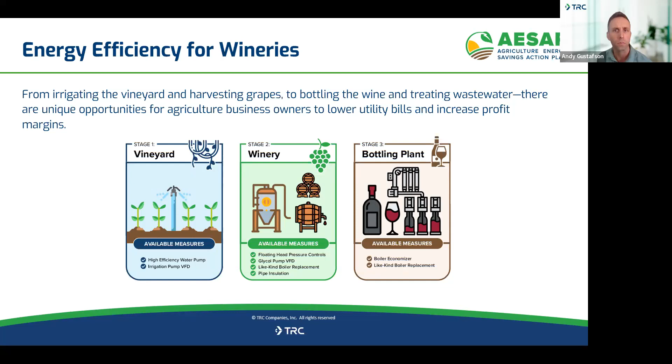So to segue into the refrigeration topic for today. Refrigeration systems are often the largest energy consumer in the winery. These systems are designed to meet full load, such as during the crush season when tanks and barrels are typically full, so the chiller would be running at near full capacity. But during other seasons, the load on the refrigeration system goes lower than that design capacity. So because of this change in load, there are often some unique energy efficiency and savings opportunities there.

For the purposes of this call, we're going to be focusing on 3 refrigeration related measures with the program that we've been promoting and have had some success with, key measures we think would be good to highlight for today. There might be other opportunities, but these are the ones we'll talk about today. These specifically include glycol pump VFDs, floating head control, and VFD trim compressor.

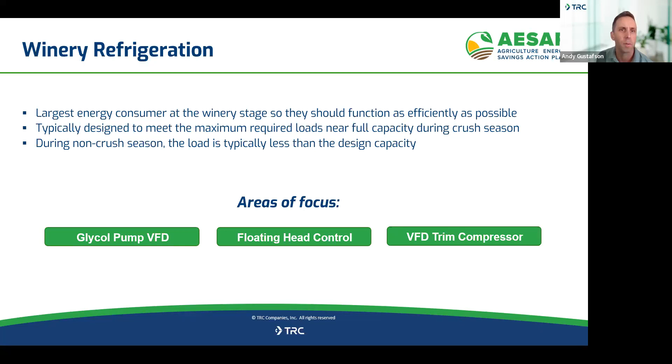So the first measure is what's called a prescriptive deemed rebate opportunity, and this is for adding VFDs to the glycol pumps used for process cooling. When I say prescriptive rebate, I'm referring to the fact that the measure is pre-approved and no pre-approval is required to implement. We simply collect an invoice and the required documentation, and we cut your rebate check. So it's a pretty streamlined offering.

This is for a situation where the glycol circulation pumps are running at constant speed, even though the glycol is being bypassed from the wine tanks and recirculating right back to the storage tanks. Adding a VFD on those pump motors will decrease the glycol flow to reflect the actual load on the system. The savings are realized similar to other pumps and fans through the affinity law, where the power is proportional to the cube of the speed. So reducing the speed of the pump results in a cubic reduction of the required horsepower, resulting in the savings. This reduces the energy required to pump the glycol by adjusting the pump speed to the actual demand on the wine tanks.

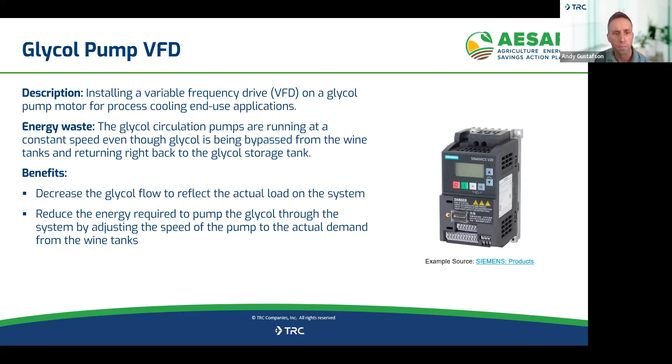Also, just a note that if the chilled fluid is other than glycol, it can be considered for the rebate, but only if the unit energy savings equals or exceeds the unit energy savings for the measure. So if you have another fluid application, reach out to our team and we can help confirm if it meets the requirements. The unit energy savings is basically calculated as the difference between the energy consumption of the constant speed pump motor and the measure case. So as long as we can show that based on the horsepower, the load, and the operation, it could qualify. The table on the right shows the specific rebate levels for this measure. And there has to be automated controls based on pressure feedback for the VFD to control that flow rate.

So we need to collect that documentation for this, but largely, if you just go ahead and you put the VFD in place, you send us a copy of that invoice along with the documentation for those requirements shown here and that are listed on our rebate catalog. We'll cut you a rebate check for it. And those rebate levels are reflected here in this table once again.

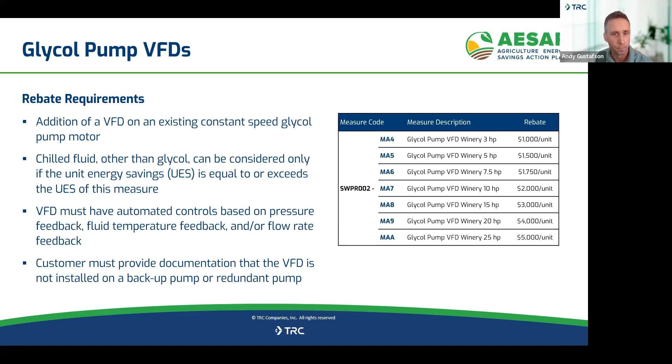So for example, if you have a 25 horsepower glycol pump VFD, that would be a $5,000 rebate. So you can have multiple of these if you have multiple pumps, but it gives you an idea of the rebate levels for that specific measure there. So that's glycol pump VFDs.

The second measure we'll talk about right now is floating head or variable head pressure control, as it's often called. This is a strategy which aims to improve a plant's refrigeration energy efficiency by optimizing both the head pressure and the intermediate stage pressure of the refrigeration plant. So often the refrigeration systems are run on kind of a set and forget it type basis related to the plant's head pressure.

So the lack of that flexibility in the head pressure leads to unnecessary energy consumption. Condensers are largely running oversized because they're designed to reach the worst possible conditions the plant might see in the wet bulb temperatures. So basically the systems are often designed to meet that worst case scenario. But as you all know, during a lot of the year, the plant condenser is under lower loads and the system is often wasting that energy.

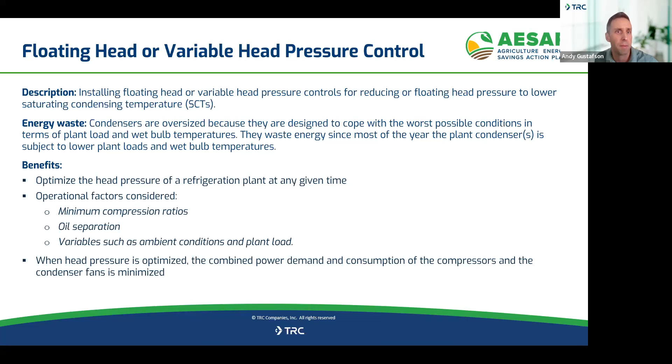So the wet bulb typically fluctuates only with the change of the weather, while the floating head depends on the wet bulb of the plant. So a well-structured floating head system will dampen those head pressure fluctuations. The reduction would also stabilize the head pressure of the plant, resulting in a more efficient and also more stable plant operation throughout the year. So as you can see on the slide here, it highlights some of the benefits and key considerations when we're looking at the floating head pressure, variable head pressure control opportunity.

The next slide here, I want to highlight that there is a deemed rebate for floating head, variable head pressure control for just specific scenarios. These scenarios include connected display cases, walk-in coolers, freezers, cooled storage, and prep area type situations. Subcooler loads and air conditioning loads are ineligible for this rebate. The rebate levels are based on the tons of refrigeration capacity and the saturated condensing temperature difference, or that TD value there. So you can see that the rebate level ranges from $150 to $250 per ton of capacity.

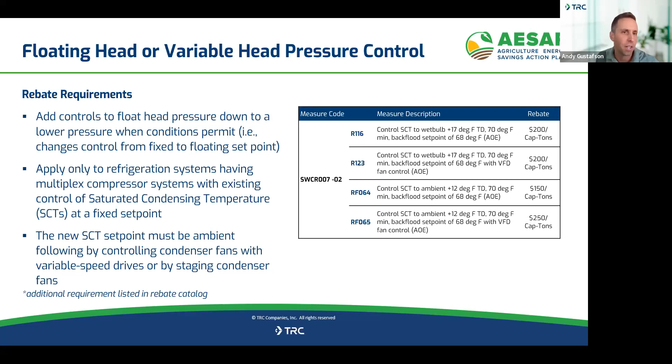If it is a better fit, the measure can be processed under a custom incentive, which is shown on the next slide that I'll get to. And our team is here to help determine what makes more sense, a prescriptive rebate or a customized incentive. They both have their pros depending on the type of application, and we can help with that.

The custom calculated approach would basically be providing an incentive. So if it doesn't fall under those conditions for the rebate shown in our rebate catalog and that prior slide, we could process the energy efficiency measure under custom calculated. That's where we provide an incentive based on calculated energy savings and also some other payback criteria from the customer, but largely based on the energy savings that we calculate. In order to do that, we would need certain information, and that information would greatly help us with that determination.

So I want to highlight some of the key information that we would need in order to calculate the savings potential. The first one shown here is the refrigeration system serving the fermenter and storage tanks. Those qualify for incentive, but we would need nameplate data for the mechanical schedule. That would include the compressors, the condensers, showing the manufacturer, model, serial number. So basically those associated nameplates.

If it's easier, we can certainly go out to the facility and take those pictures ourselves. If anyone that's interested in this can go out, snap a picture of the nameplate of those key mechanical equipment and send that our way, that would be a really good first start in determining the savings potential. The other key thing we would need is trend data, the digital trend data, if it's available from the SCADA system or other system that might be in the control panel for the compressor system.

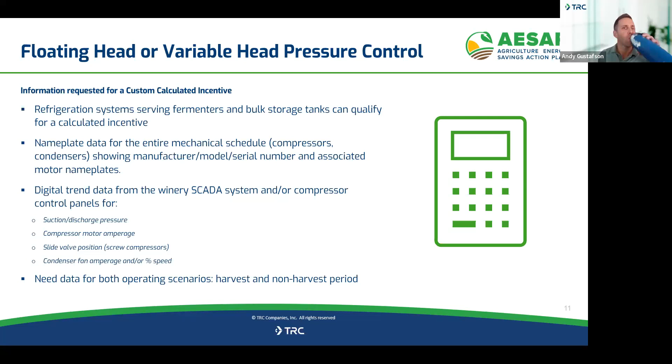All right. I want to briefly put up a censored project example that we did with our program with a winery customer. This was a crush winery located in California. They worked with TRC, our AESAP program, to do floating head pressure controls. That specific measure saved about half a gig, 500,000 kWh of energy savings. Right about half a gig.

The cost savings based on their utility rate was about $81,000 per year. And the capital cost for that variable head control measure was about $35,000 for this specific scenario. So that gives you an idea of the project cost and annual savings you might see. We also were able to provide an incentive of $17,000. So taking the project cost minus the incentive, divided by the annual energy savings, the payback was quite good at just a couple months.

One thing I want to highlight is what we've seen historically, and it might not be for every scenario, but often with a floating head pressure control measure, the energy savings and benefits compared to the project cost are quite good. The project cost isn't typically that high and can result in some really good energy savings. So this is one of the measures we often go after to get the biggest bang for your buck as far as energy savings potential. So a great measure that is definitely worth considering, depending on the type of operation you might have.

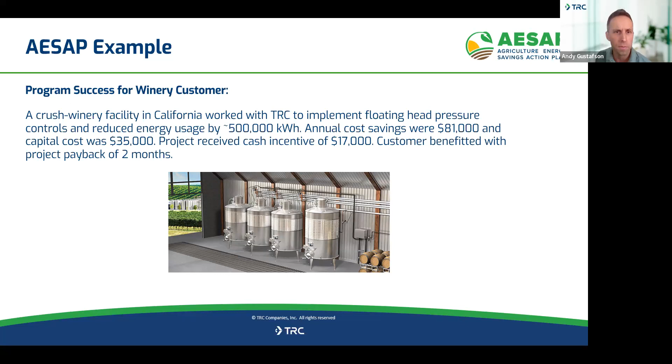VFD controlled trim compressor is the third measure we're discussing today. Many of the larger refrigeration plants we encounter use several compressors. And in a lot of those cases, the system controlling those compressors maintains and controls the capacity without necessarily optimizing efficiency. It's also common for us to see screw compressors unloading using slide valve control, and because of that, they are often inefficient when operating at part load. Sometimes we see multiple screw compressors running at part load inefficiently. So there's some opportunity there.

With slide valve control, the reduction in refrigeration capacity of a screw compressor relative to the power consumption is disproportionate. For example, at a 30% slide position, the refrigeration capacity of the screw compressor is approximately 40%, whereas the power consumption is excessive at approximately 60%. This inefficiency is true whether the slide valve opens in a continuous manner or in stages. So if you have stages, say 100%, 75, 50, 25, it still can be inefficient.

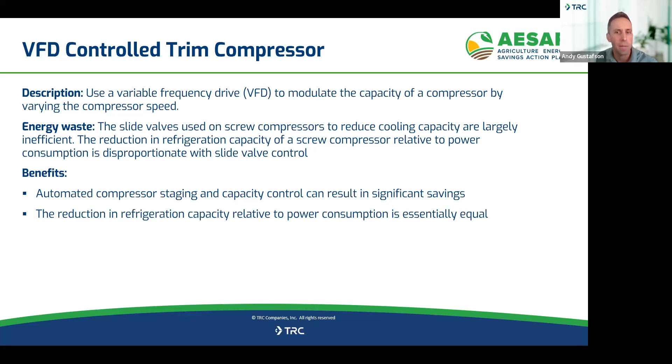The alternative to this type of operation is to use a variable speed drive to modulate the capacity of a compressor. The reduction in refrigeration capacity relative to the power consumption is essentially equal, especially in the 40 to 80% refrigeration capacity range. This next graph shows the reduction in refrigeration capacity relative to the power consumption, how it's essentially equal, especially between that 40 and 80% range. The energy saved is represented by the area between the lines here. So I just want to highlight that that's another good opportunity.

While not covered in these three opportunities, I do want to state, related to compressors, that for refrigeration systems with multiple compressors, implementing compressor staging and capacity control can also result in some good savings. An automated compressor staging system takes into account the various compressors in the refrigeration system and progressively turns them on during increased load or off during decreased loads, based on the suction pressure. So staging could also be a measure to consider outside of a VFD controlled trim compressor as well.

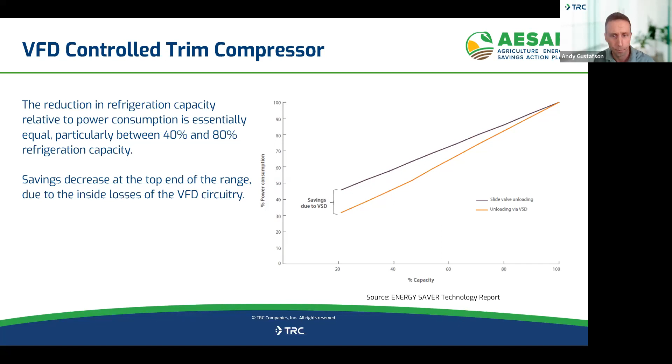Just know that the intent here is not just to point you to this catalog and let you figure out the requirements or what you need to do. Our team is here to help. It's just supposed to give you an idea and a resource to know what the requirements are and what the rebate levels are. So please feel free to check that out to get a better idea of those prescriptive rebate levels and the requirements for each. Once again, these are for those measures that are prescriptive rebates and do not require pre-approval.

With that said, I'd still suggest you reach out to us, even though you might not need a pre-approval. Before ordering that equipment, you can always reach out to us so we can make sure the equipment you're considering meets the requirements shown. We're happy to help there.